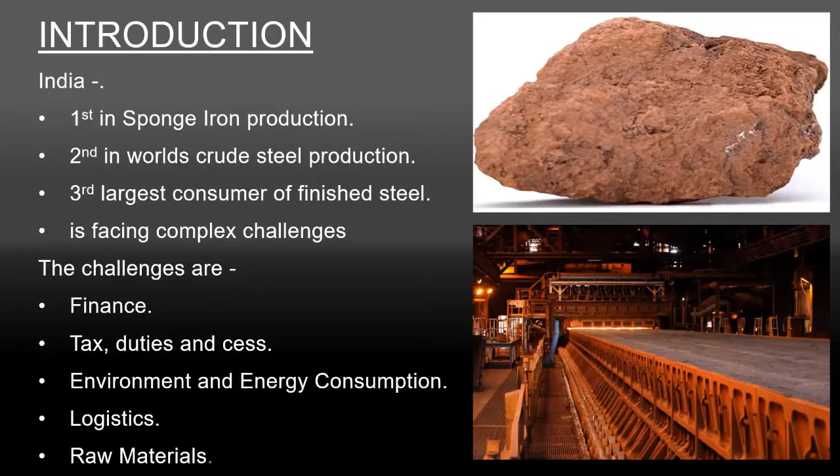As of 2018, India is first in sponge iron production, second in crude steel production, third largest consumer of finished steel. In spite of these rankings, it is facing some challenges, and some of the challenges are finance, tax, duties and cess, environment and energy consumption, logistics and raw material. Out of these, raw materials is the key challenge we are facing now.

Although India has abundant reserves of iron ore and coal, it has negligible reserves of coking coal. 68% of steel making through blast furnace route requires 180 million tons of coking coal. Raw material and the commodity are bulk, so they are very difficult for transportation. India imports coking coal from Australia with high fluctuations in supply and price.

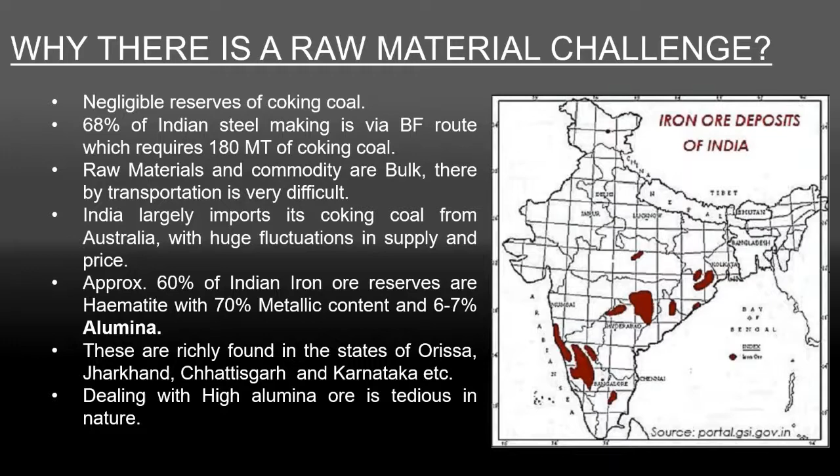60% of Indian iron ore reserves are hematite with 70% metallic content and 6 to 7% of alumina. They are richly found in the states of Orissa, Jharkhand, Chhattisgarh and Karnataka. Dealing with high alumina ore is tedious in nature. Utilization of high alumina iron ore is given more significance. Indian hematite ores are typically rich in iron, but they contain high alumina.

Blast furnace iron making with high alumina iron ore has operational difficulties like high operating temperature, high liquidus temperature of blast furnace slag, and higher coke rate. Alumina being acidic, it decreases the basicity of the slag, thereby leading to a thicker slag formation.

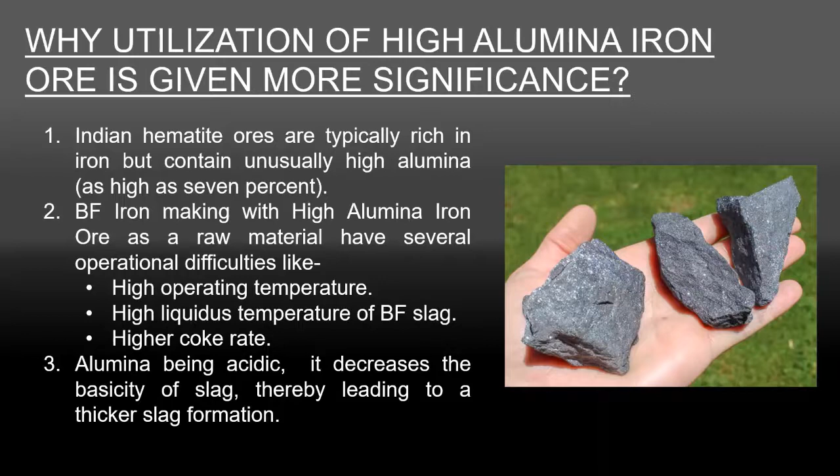Role of alumina in iron production. Alumina has its own effect on sinter. Most harmful effect is it worsens RDI value: for CaO of 10 to 10.5, increasing 0.1% of alumina increases RDI by 2 points. Alumina increases the viscosity of the primary melt. It weakens the sinter structure. It promotes excess accumulation of molten slag in the hearth region and increase in the pressure drop at lower parts of the furnace. It has adverse effects.

Some of these are it has greater tendency towards silicon reduction, thereby increasing the silicon level in the hot metal. Presence of alumina makes the slag very viscous in nature, thereby decreasing the transport of ions of gangue particles from metallic ore to the slag. Sulfur in metal increases as alumina content in the slag increases. So ultimately, high alumina slag contributes to less efficient desulfurization.

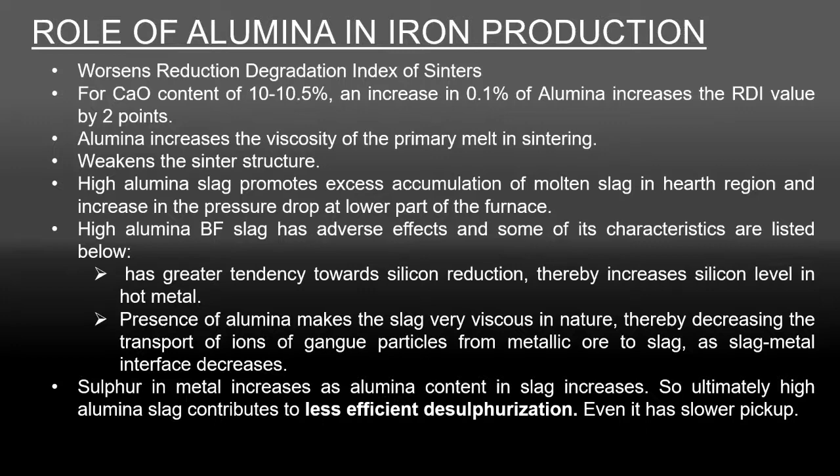Alumina in steel comes from deoxidation and wear of alumina refractory and is present as inclusions in the steel. So these are the inclusions you can see here. This one, and these are all the inclusions. These inclusions degrade the properties of steel, especially the mechanical properties.

They are brittle in nature, and as a result, while rolling, they break, causing serious surface defects. When they coalesce, they form irregular clusters, which degrades the toughness and fatigue life of steel. Even while casting of steel, alumina accumulates in the nozzle, which results in clogging of that nozzle.

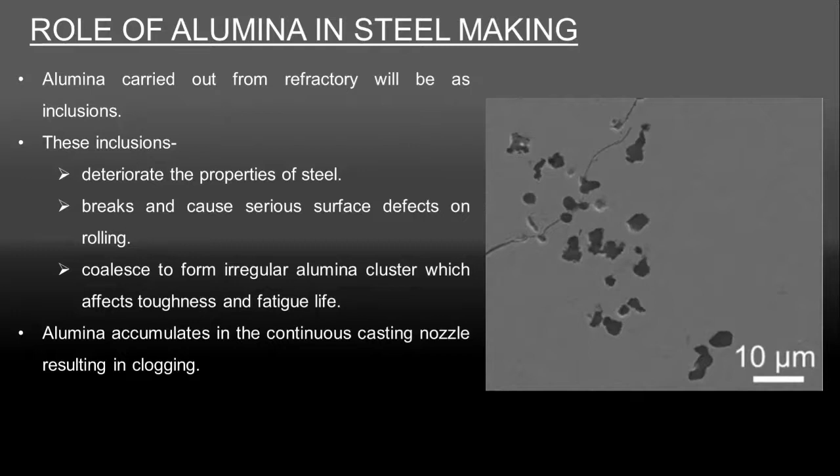Coming to recovery techniques and remedies, one of the research-based recovery techniques is magnetic separation of Sanje iron ore in Zambia. A Series L model magnetic separator has been used with wire mesh or pipe as matrix of a magnetic particle collector. Magnetic density is varied from 3000 to 10,000 millitesla and pulp density is varied from 2 to 10% with a constant flow rate of 7 liters per minute.

Coming to magnetic flux density variation, if we vary it from 3000 to 10,000 millitesla, recovery has increased from 76% to 93%, and silica content has decreased from 19.98% to 18.79%. And if we increase more than 10,000 millitesla, there is a decrease in recovery.

And coming to pulp density, at constant magnetic density of 10,000 millitesla, from 2 to 2.5%, recovery has decreased from 93%, and if we keep on increasing the pulp density, there is constant recovery. Optimum recovery has been obtained at 7.5% pulp density, that is 89% of recovery. At this pulp density, the content of iron is 49.72%, alumina is 4.19% and silica is 18.08%.

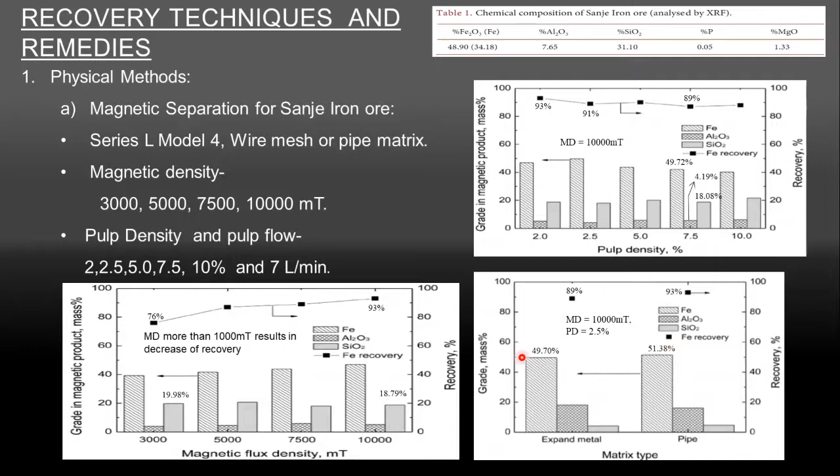And coming to type of matrix, expanded metal, which is the wire mesh, has 89% recovery with 49.70% of iron content, and pipe metal has 93% of recovery with 51.38% of iron.

Here are some chemical methods to decrease the effect of alumina in BF iron making route. We can increase magnesia content in BF burden. It is helpful as it suppresses the increase of permeability resistance in the cohesive zone. Magnesia helps in maintaining good slag drainage rate. It also decreases sulfur content in hot metal.

Addition of extra slag forming elements dilutes the concentration of alumina in slag, but this is just an occasional remedy because if we keep on adding slag forming elements, slag volume increases but productivity decreases.

Alumina inclusions in liquid steel are present in solid state. To convert them into liquid state, we can add calcium to liquid steel as it forms calcium aluminates with those inclusions, which have low melting point as low as 1600 degrees centigrade. Liquid phase content increases with lime. For 100% liquid phase, 35% lime is enough. The minimum melting point of calcium aluminates is 1400 degrees centigrade, that is, they will be in liquid state even after steel solidifies, or at least until steel solidifies.

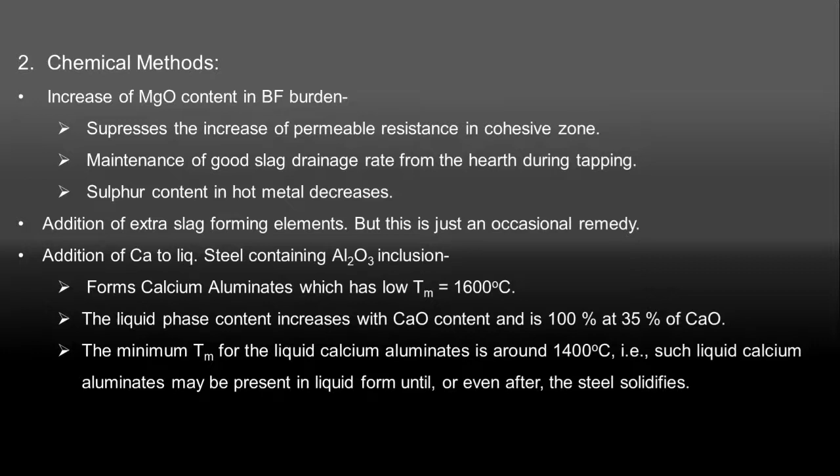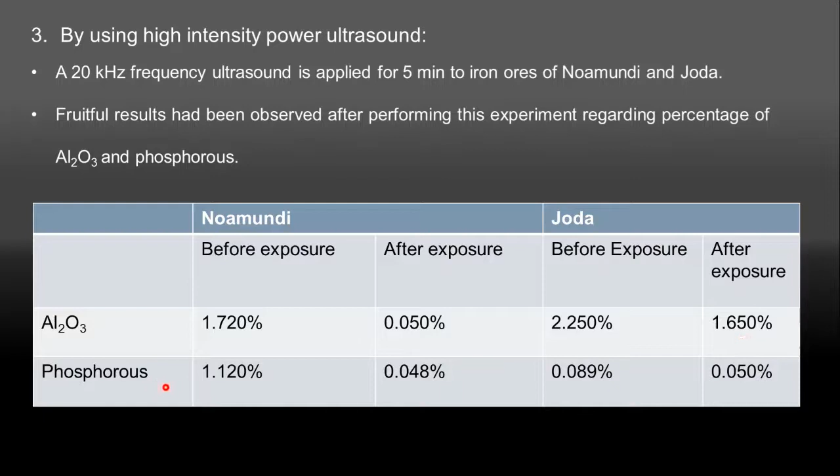In this slide, we will see an experiment in which samples of iron ore from Noamundi and Joda have been exposed to high intensity power ultrasound of 20 kHz for 5 minutes. After the experiment, good results have been obtained in terms of decreasing the content of alumina and phosphorus. As you can see in the figures of Noamundi iron ore, before and after exposure, the alumina content has decreased from 1.7% to 0.05%, and the same happened in Joda iron ore also. Phosphorus content is also decreased, as you can see.

And finally, the conclusions will be as follows. Internal desulfurization is not favorable as sulfur content in hot metal tends to increase with alumina content in slag. Addition of lime and or magnesia to form ternary and quaternary compounds with alumina would be handy. Beneficiation of iron ore along with the above discussed methods in this presentation will help in decreasing alumina content in BF route of iron making and steel making.